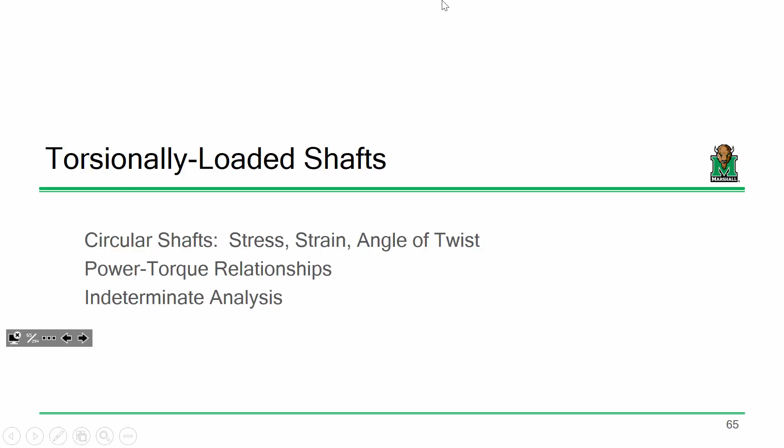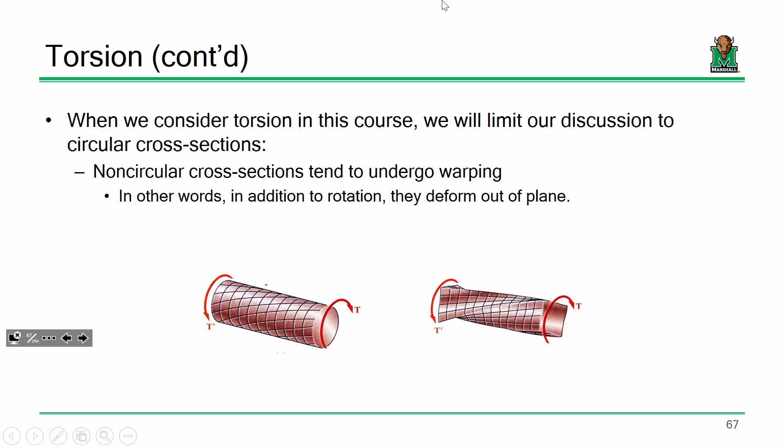Okay, so I'm not going to go through this derivation again, I promise I won't do that to you, but I do want to at least go through the broad strokes. So we're talking about torsion now. The idea is you're taking a segment and you're twisting it. We talked about the idea that we're only going to reserve our discussion for circular members: shafts, pipes, things like that. Nothing square, nothing triangular. If I give you a torsion problem and it's non-circular, I made a mistake, okay?

Now, if you are interested in torsion of non-circular sections, take advanced stress analysis. As far as I know, I'm offering that next semester, so that'll be some good stuff. There's some fun stuff in that class. It's sort of mechanics of deformable bodies 2, if you will.

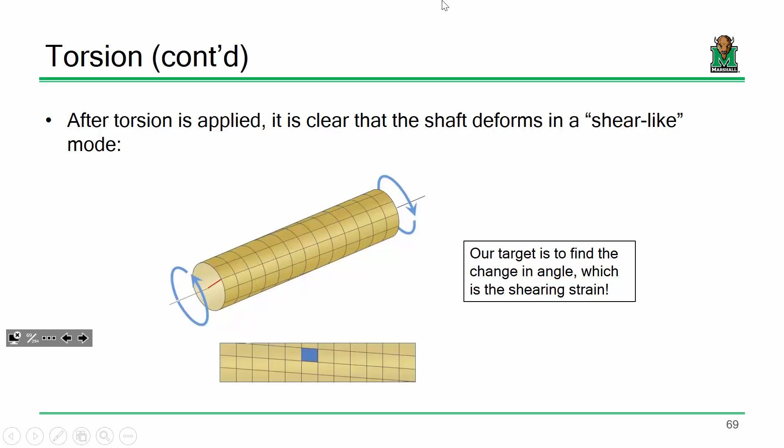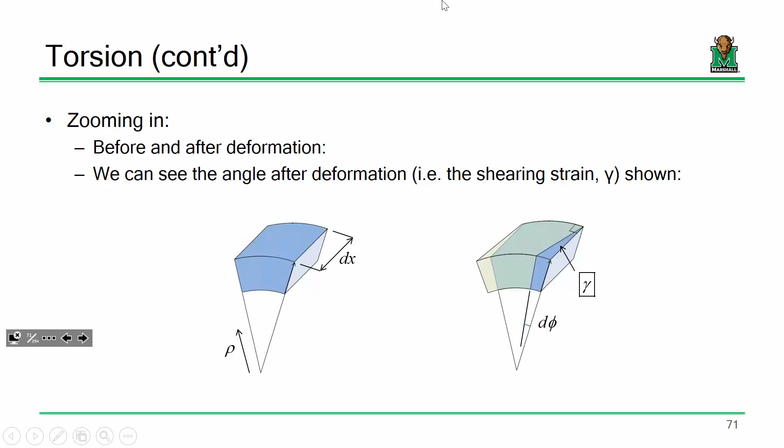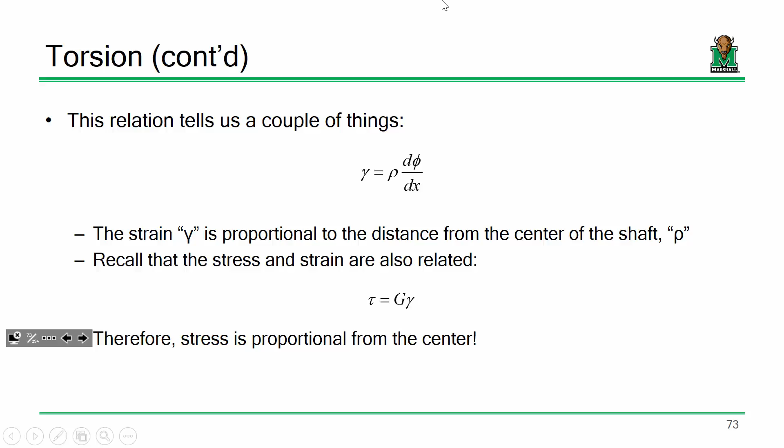Okay, so we went through our derivation, and I'm going to skim over this very quickly. But a few of the observations that we made were that the deformation and the strains were proportional to the distance from the center. In other words, if I take a circular shaft and I twist it, I don't get any stresses or strains at the dead center.

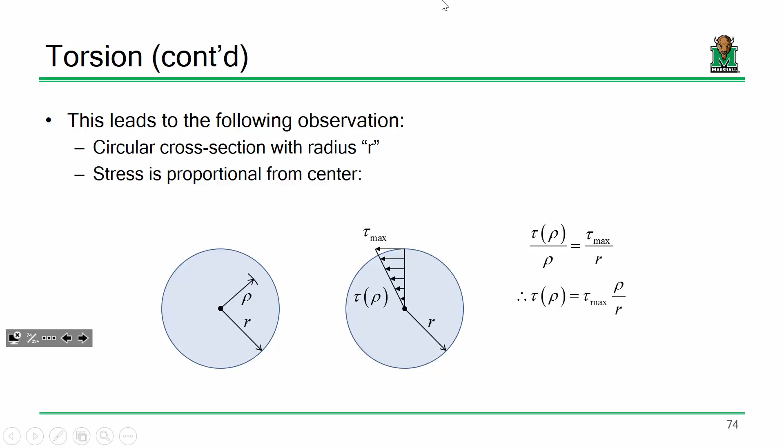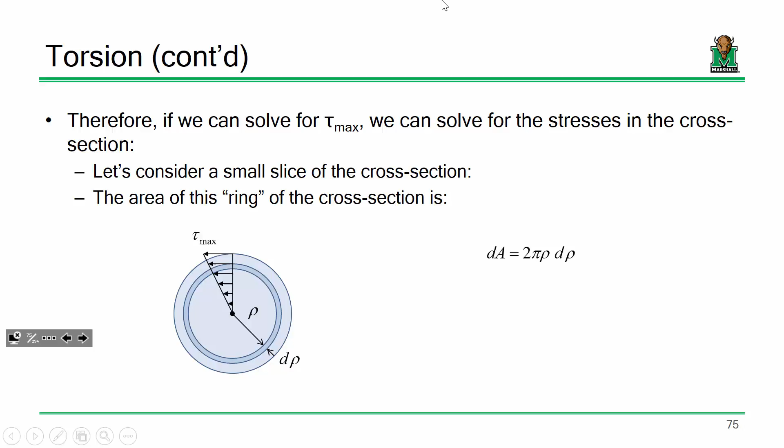But the farther I get away from the center, the more stresses and strains I develop, okay? So we have a shear stress profile that looks about like this: linear from the center, zero stress at the center, maximum stress at the edge. And then we use some integration concepts to integrate that stress, and ultimately that torque about that cross-section, to try and solve for that maximum stress.

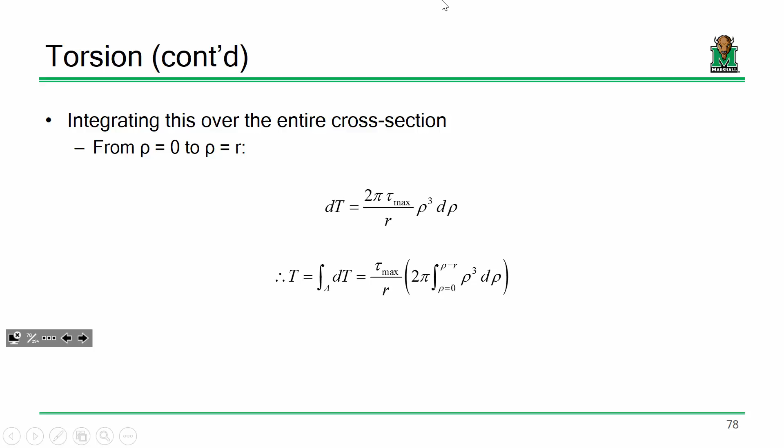And after you go through the calculus and plug and chug and do the grunt work, you find that you're isolating a very particular integral by itself. You're isolating this: 2 pi times the integral of rho cubed from 0 to r. That is a very particular important integral, and it is a particular what we call section property.

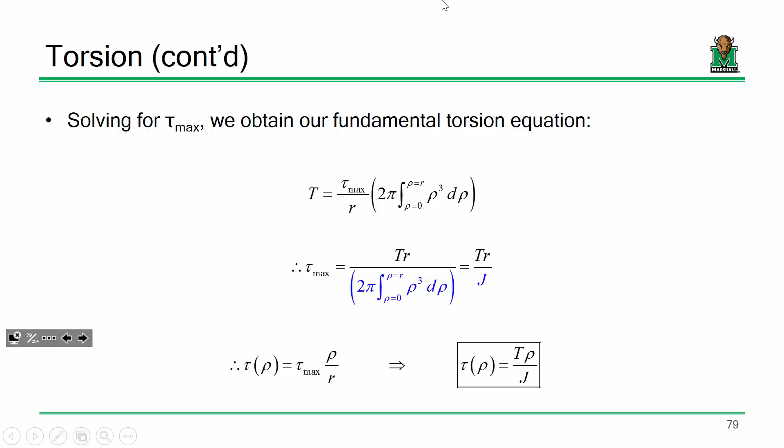So the idea is if I take a samurai sword or lightsaber, if you're a sci-fi fan, and I cut through that circular shaft, I'm looking at a circle. There are certain properties of that circle that are important to us as engineers, things like the area, things like the center of gravity, and also things like J, things like this integral.

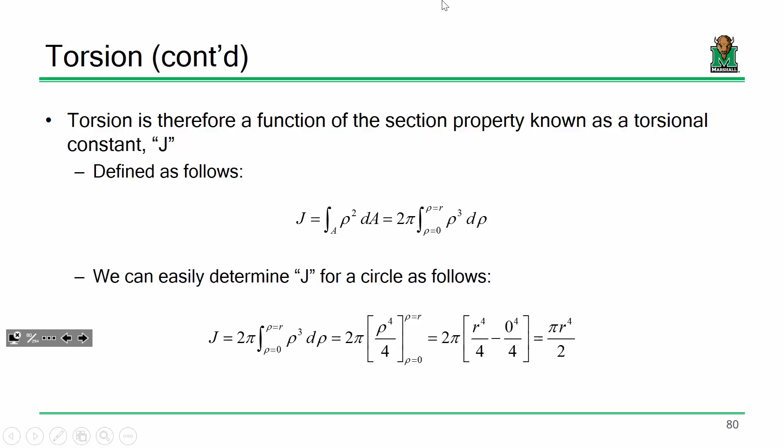J for a circle is essentially the same thing as the polar moment of inertia, which is why the book uses I sub P. I like to use J because it differentiates between pure torsion and that warping aspect that we mentioned later. Plus J's less letters than I sub P, so I tend to be lazy when I can be.

Okay, so the nice thing about it is they're very easy plug and chug expressions. So this is J for a solid shaft, and this is J for a pipe. Similar to how you compute area, if you've got a pipe, you take J for the large section minus J for the small section, and you get J of that ring, that pipe.

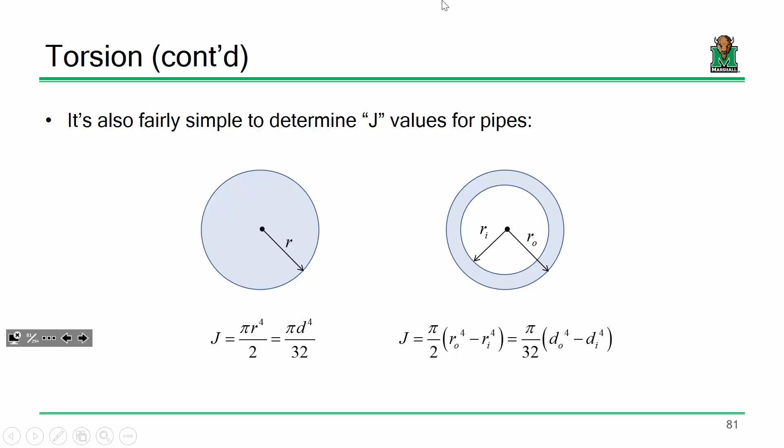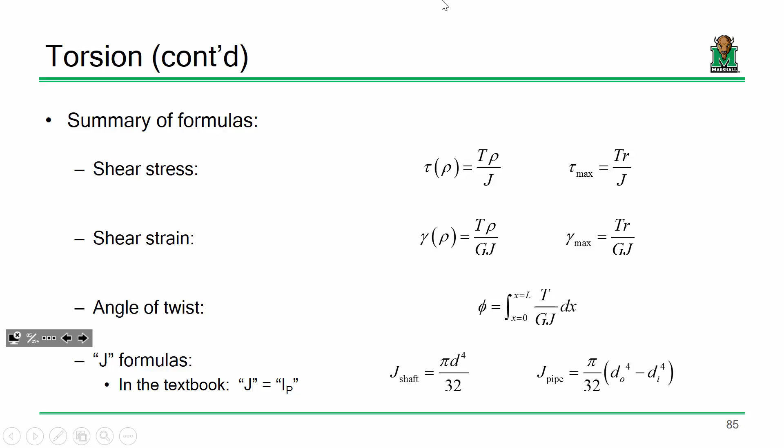Going through and doing some plug and chug, skipping over this quickly, we're able to obtain a summary of torsion formulas we'll use in our assessments. Shear stress is T rho over J, and the maximum stress is at the edge, TR over J. Shear strain is that divided by G, which is the shear modulus, just like E is the axial Young's modulus. We've got our angle of twist, J formulas for shafts and pipes, and if we've got a constant T and constant J, we can just plug and chug.

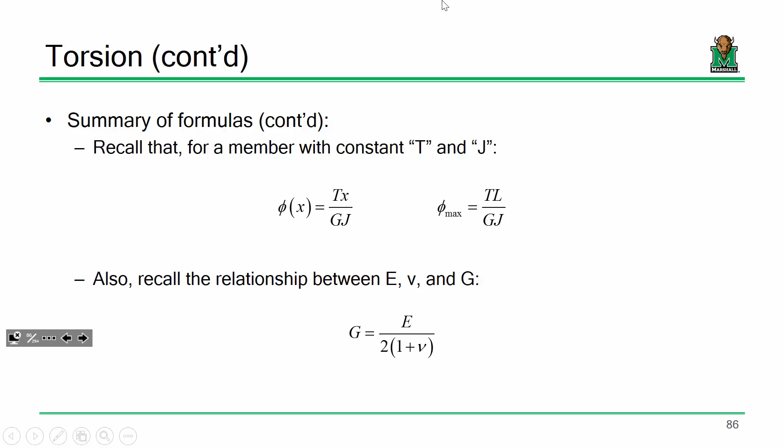Okay? Make sense? Last thing, remember your relationship between E, Poisson's ratio, and the shear modulus G.

And then we did this example, we did this one, and we hadn't quite gotten to this one. So did anybody have any questions about this example? If I remember correctly, we finished it just in the nick of time. So is everybody good on this?

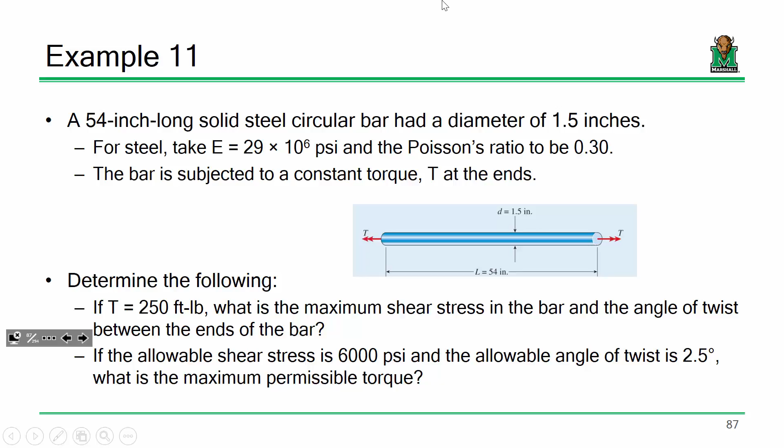Okay, so I got another one for you, somewhat similar. Let me move some of this stuff out of here. All right, give me a moment, let me get this organized so I'm not creating a complete mess. You'll notice some of this stuff probably has a little bit more of a mechanical flavor than civil flavor, but that's just the nature of the beast when it comes to torsion.

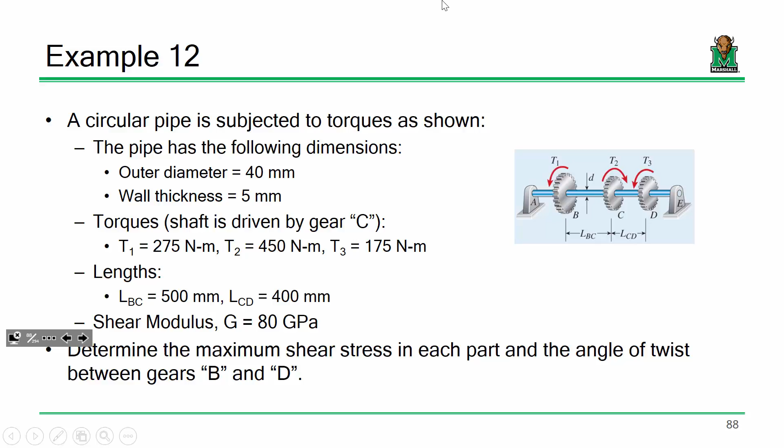All right, so let's see if we can start listing some properties and being clear on some of this. Let me get some of this out of the way. I keep moving stuff around, but it'll be all right.

So the first thing I want to do is look at some given parameters, and the first thing I want to look at is that pipe. Let me go back to this. Wait, wrong one, let me go back to this. Okay, so let's read what it says: I have an outer diameter of 40 millimeters, and I have a wall thickness of 5 millimeters.

Now maybe what I ought to do right off the bat is choose something: I'm going to choose that my forces are ultimately going to be in kilonewtons, and my lengths are going to be in millimeters, just so we can be clear. I'm usually a U.S. units guy, so it helps me out - a lot of the stuff we've done in U.S. units, we've reserved ourselves mostly to kips and inches. I just wanted to set that right off the bat.

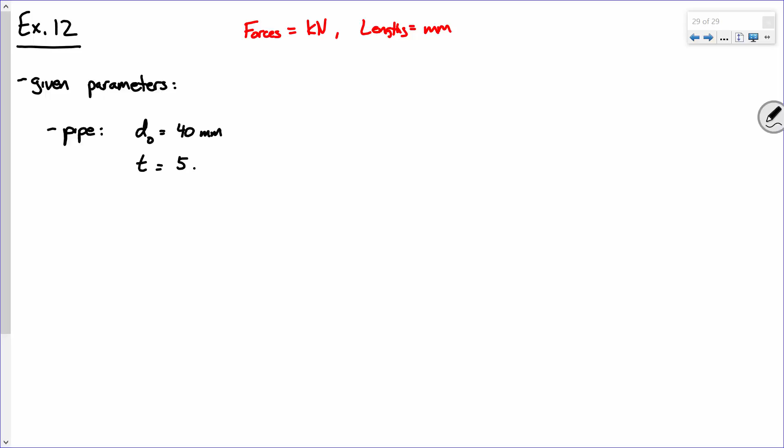Now for this pipe, we know the outer diameter is 40 millimeters, and the wall thickness is 5 millimeters. So help me out, what's the inner diameter? It's 30. Now if that's unclear, let's take a look at this - so here's the pipe.

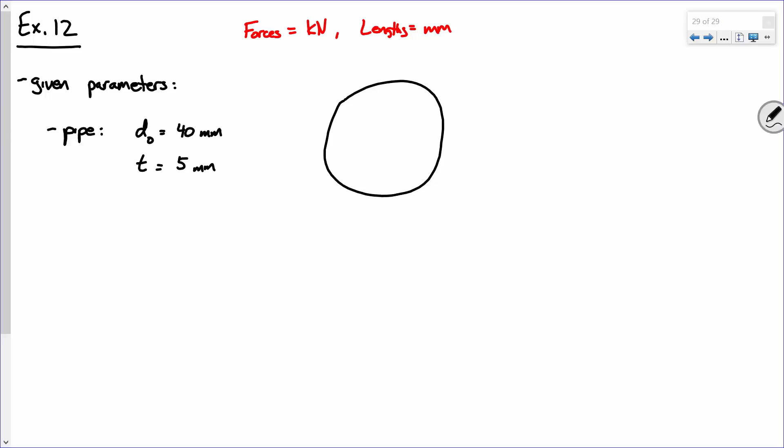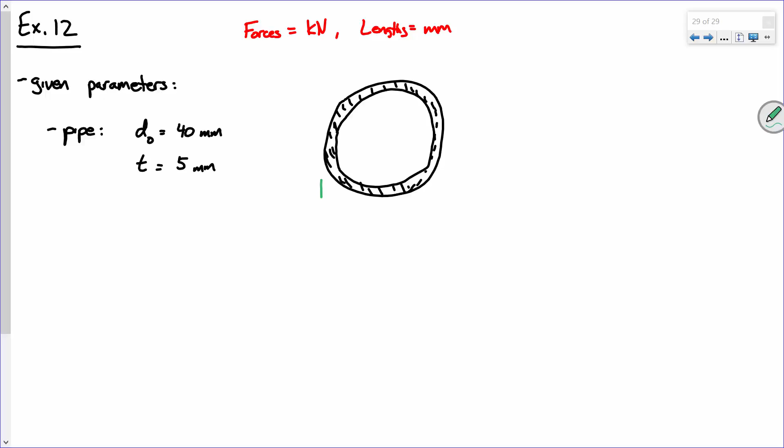Okay, I'll shade that in a little bit. So there's the pipe - those are the best circles you're going to get me to draw. This outer dimension we see right here, this is 40 millimeters, right?

Now this wall thickness right here is 5. So how do I get from here to here? Well, I take 40, and I've got to subtract one on the right and one on the left - I got to take 2 wall thicknesses off. So that means this is 30 millimeters. So DI is DO minus 2T, which is 30 millimeters. Make sense? Not too bad, right?

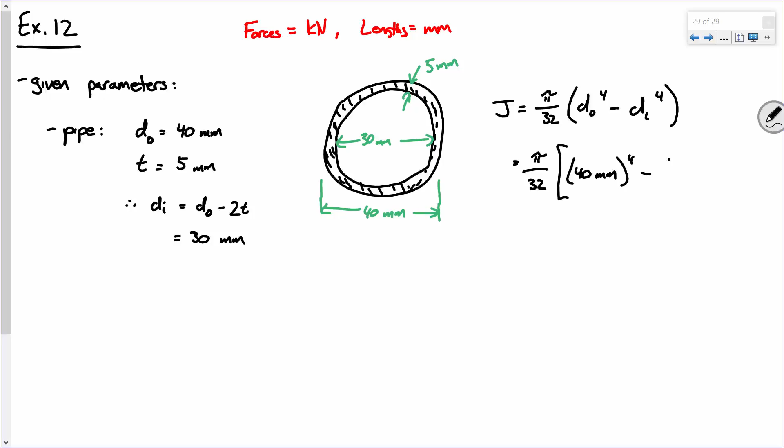All right, if I'm given that, I can go ahead and compute J. Now J, for a pipe, is pi over 32 times d naught to the 4th minus di to the 4th. Make sense? So that is pi over 32, 40 millimeters to the 4th minus 30 millimeters to the 4th. And so what do we get right here?

There we go. All right, so 171,805, point 8 or so, millimeters to the 4th. All right, so far so good.

Now I wanted right off the bat to put these units down because I wanted to show you something you might not remember. So I want to look at G. Our given parameter, we know G is - was it 80 gigapascals? Well, the nice thing about the units is that if I take a kilonewton and divide it by a millimeter squared, I get a gigapascal.

So I don't need to convert anything at all, okay? See, a newton per meter squared is a pascal. Well, if I'm multiplying by 1,000 and then dividing by 0.001 squared, go through and do all the math, that turns into that giga prefix. All right, sound good? Everybody okay with that? Yep. You got 10 to the 9?

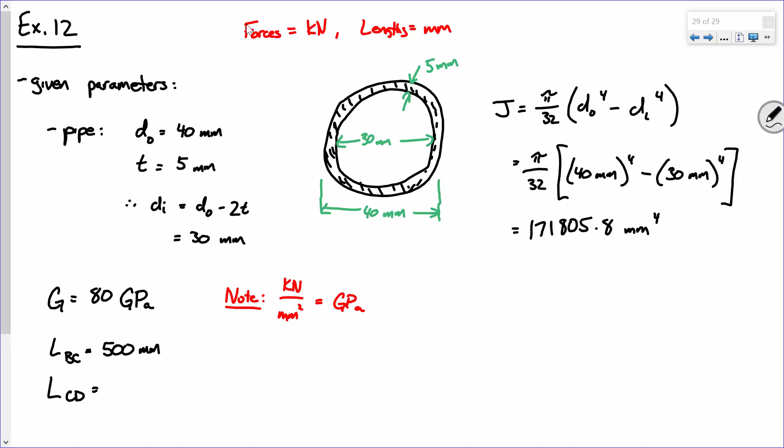All right, now let's also write these lengths. So the lengths, we've got length BC, which is what - was that 500 millimeters? And length CD, which is 400 millimeters. All right, so far so good?

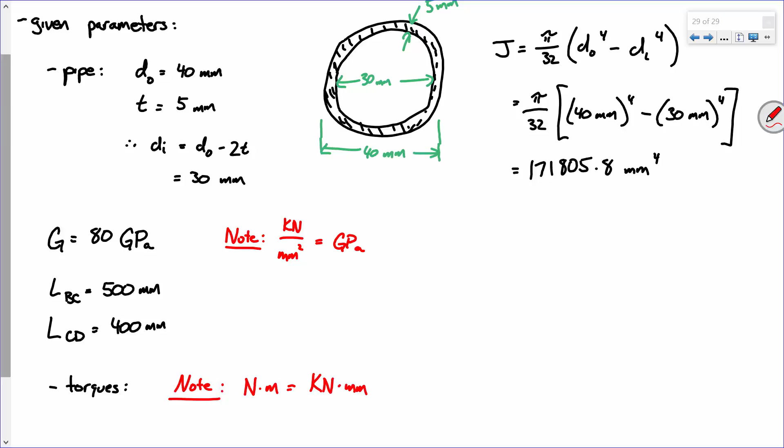Okay, now let's also look at these torques. There's also another nifty component about torques before we begin. Note, I propose to you that a Newton meter is the same thing as a kilonewton millimeter. It's the same thing. Now how am I getting that? Well, that K, when you see K, basically you're just multiplying by 1,000.

So if I multiply by 1,000, or 10 to the 3rd, and then multiply by that M, which is basically dividing by 1,000 - what's 10 to the 3rd times 10 to the minus 3rd? Just cancels out, it's just 1. So a Newton meter and a kilonewton millimeter are the same thing.

Yes sir? Well the gigapascals, how did you get 10 to the 9? Okay, because what I'm doing is this - watch this. So I've got 10 to the third times newtons, and I've got 10 to the minus third times meters, squared. So that's going to be 10 to the third newtons over 10 to the minus 6 meters squared. So 10 to the ninth Newton per meter squared. Because when you divide, remember you subtract the exponents, so it's 3 minus negative 6, or 3 plus 6. That's 9. That's a good question.

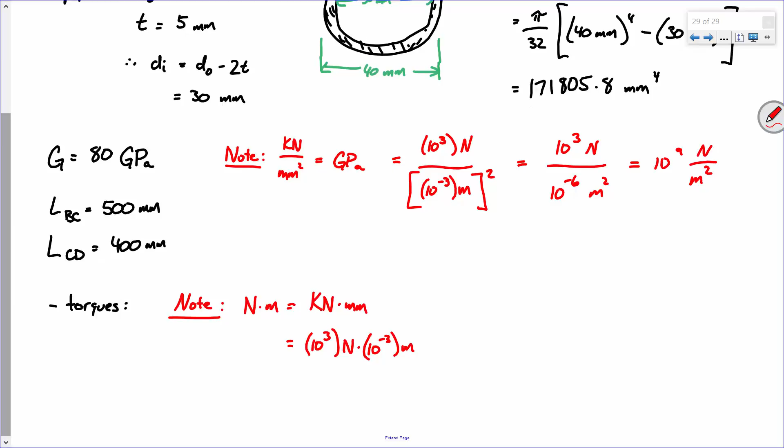All right, everybody good? All right, so far so good? All right, I'm going to run out of room here, so I'm going to go ahead and go on to the next panel. Everybody good?

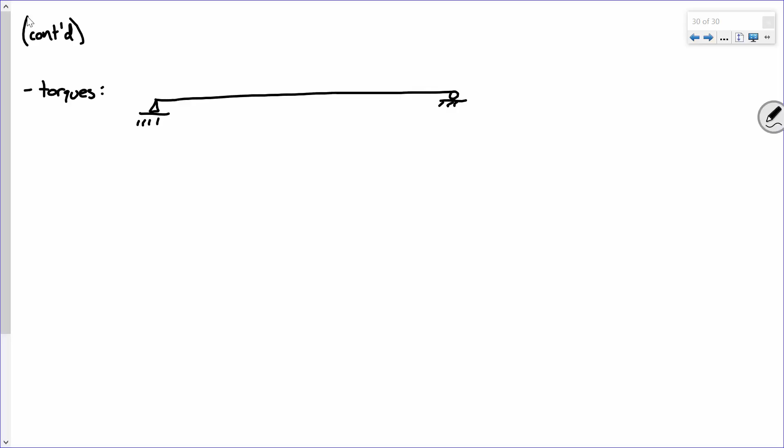All right, okay, so let's look at these torques. Now what I'm doing is I want to determine the torque inside each component of this bar. So what's the bar look like? It's kind of like this, kind of like that. So let's call this A, B, C, D, E, okay? And let me give me a moment, let me go ahead and pull the image up.

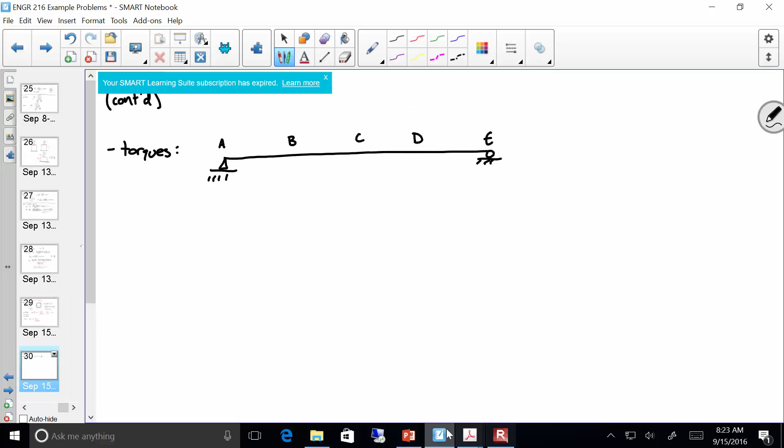Oh wow, that is much larger than I thought it would be. Okay, so using our right-hand rule, remember that right-hand rule?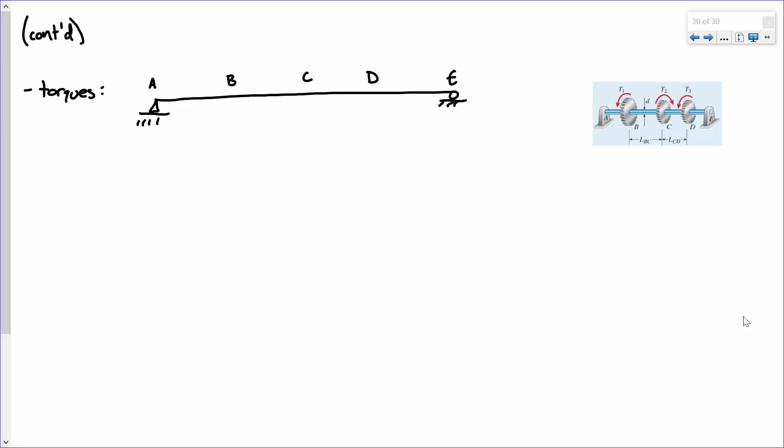Okay, so torque 1 is sort of going like this, right? T1, so it's sort of like, right here, and it's going like that, along the shaft, right? Make sense? And so this is T1, and what's the magnitude? What's that, like 275 kilonewton millimeters, right? Because that's what's going on there.

Now T2 is going in the opposite direction, like that. So that's T2, and that's 450. Oh, getting ahead of myself. And then this one's going like that. So T3 is, was it, oh no, it's 175, right?

Okay, does everybody see how I'm doing that? I just want to make sure you all are understanding the sign convention. So far, so good?

Now let's just be clear on our goal here so that we understand why I drew all of that. Let's look at, for instance, segment BC. We know the length of that segment, we know the G for that segment, and we know the J for that segment. And same thing with CD, we know how long it is, we know the G, and we know the J. What we don't know are the torques, okay?

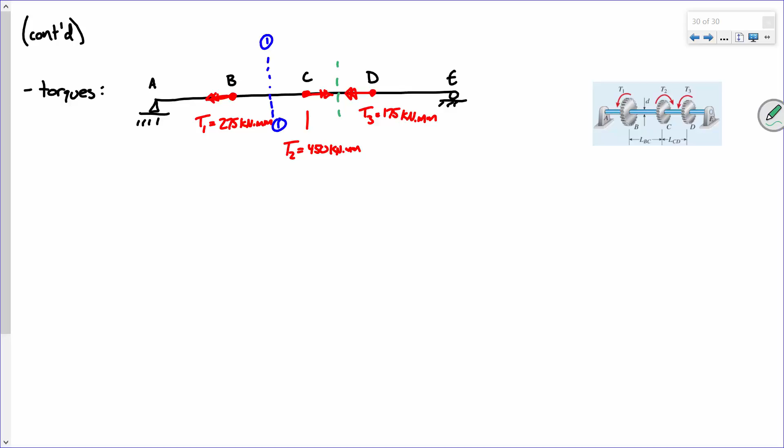Section 2. Yes? T1, if you go like, use the right-hand rule, is it pointing to the right? Follow it like this. Oh, I did that backwards, didn't I? So, oh, they're all backwards. Whoops. It's me going like this, back and forward. So they're all backwards, actually. Whoops.

All right, down to 4 mistakes, I think, right? So that one's, yeah, that one's going like this. This one, yep, going like that. And this one's going like this. Make sense? So far, so good? All right.

So let's look at this first section. All right, so I've got T1 is 275 kilonewton millimeters, and here's where I cut the section. Now that torque is acting like this, right? So far, so good?

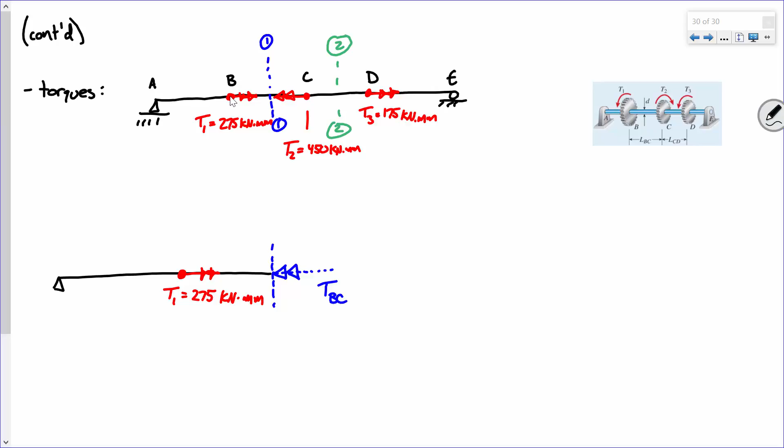Yep, so what that means is that inside this segment, I got to have a torque acting in the opposite direction, right? Make sense? So I'm going to call this torque BC. Make sense? And if I just think about it like it's sum of forces, if I sum torques and say the sum of torques has to equal 0, I get that TBC is 275 kilonewton millimeters acting like that.

Make sense? So far, so good? In other words, the torque, the shaft, or no, in this case the pipe, because it's a pipe, it responds by developing a torque in the opposite direction. Make sense? Not too bad, right? Okay.

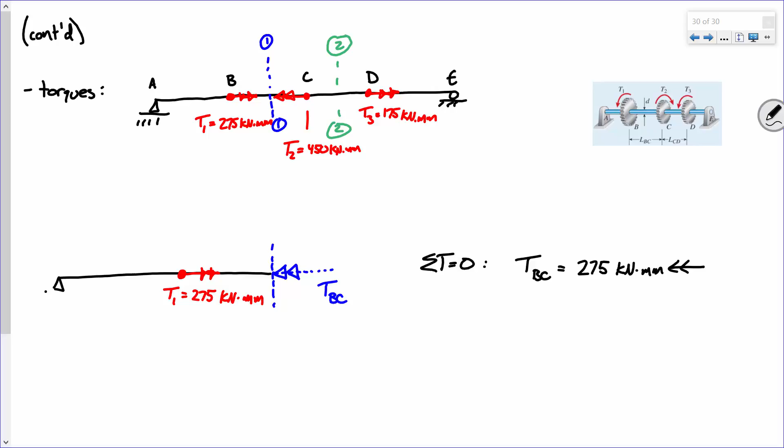Now, oh goodness, this thing's getting tangled. Now for the next one, I'm cutting this section like so, and I've got, what do I have? I've got T1 is 275 kilonewton millimeters acting like that, right? Make sense?

But I've also got, at point C, a torque going like this. Right? So think about it like this. If I've got 450 kilonewton millimeters going this way, and I've only got 275 going this way, I need a torque acting in the opposite direction.

What's that? No, well, think about it like this. Imagine if they were forces and not torques. Imagine if I had 450 pounds pulling to the left, and I only had 275 pulling to the right. I need an extra how much going to the right? 175, see what I mean? So the torque's going, think about it like it's forces, because it's basically the same thing. If I've got 450 going to the left, I've got to have 450 going to the right. In this case, we're not dealing with forces, we're dealing with twisting it, but basically we're saying the amount twisting it this way has to equal the same amount twisting it that way. Same concept, make sense?

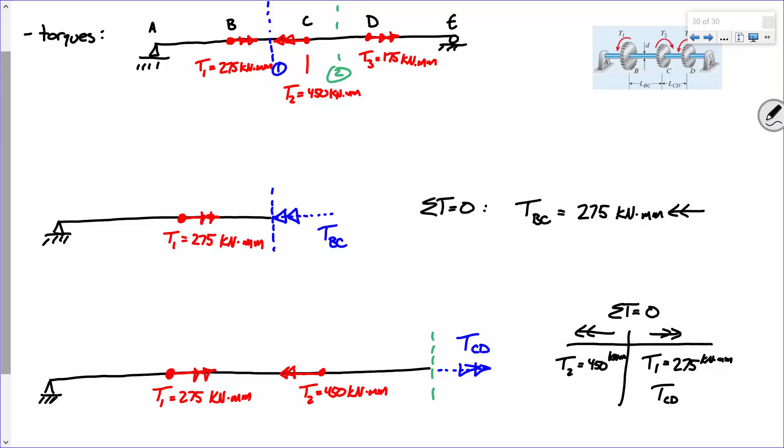And then TCD, I'm going to have 450 equals TCD plus 275. So therefore, TCD is 175, and it's acting like that. Make sense? So my point is that within segment BC, I'm going to get some rotation, and within segment CD, I'm going to get some rotation. The point is that BC is going to rotate one way, CD is going to rotate the other way. So I'm going to take those rotations, I'm not going to add them up, I'm going to subtract them. Does that make sense? Okay.

So is that like an internal bending moment? Yeah, but it's bending along the axis. It's a moment, but it's along the axis. It's axial. Not like this, like that. But yeah, it is a moment. Make sense? Okay, all right. Everybody good?

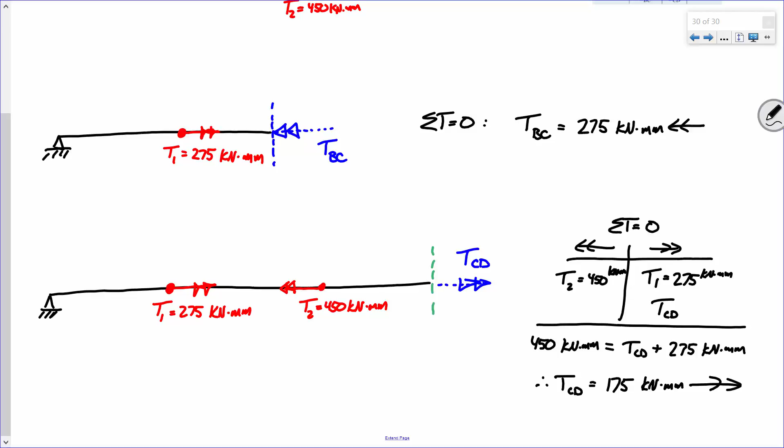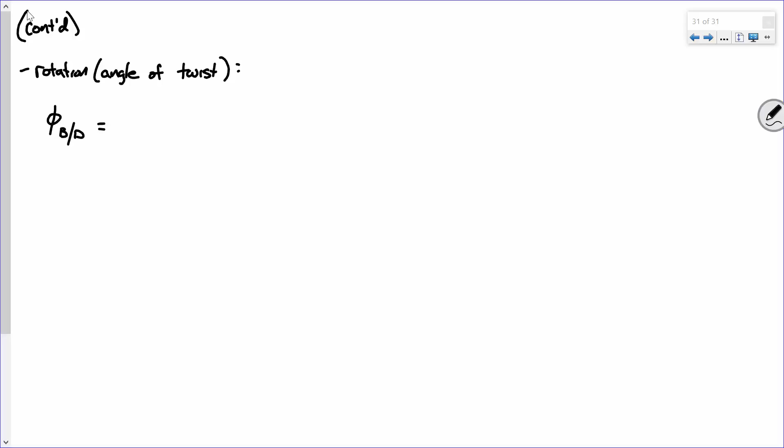Okay, so now what we're going to do is we're just going to take care of this directly. Let me start off with the rotation first, because I think that this is going to be the most straightforward. Let's start off with the rotation, or the angle of twist. Here's this. Okay. Now, ultimately, what we're trying to find is the angle of twist between point B and point D. Okay? I propose to you that to get the angle of twist between those 2 points, all we have to do is just sum up along the length. In other words, I propose that we take the angle of twist between B and C, and then add to that the angle of twist between C and D. Does that make sense? That if I get the angle of twist from here to here, and then the angle of twist from here to here, I get the angle of twist between the whole thing. Make sense? Okay. All right.

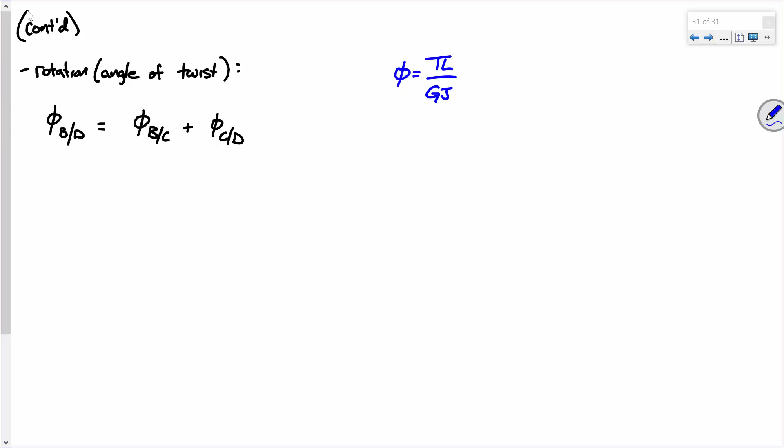So how do I get the angle of twist? Well, I mean, how do I get it in general? I have constant torques within each of those segments, and I have constant J for each of those segments, right? So if I got that, it's TL over GJ, right? No integration. So let's take each of these one at a time.

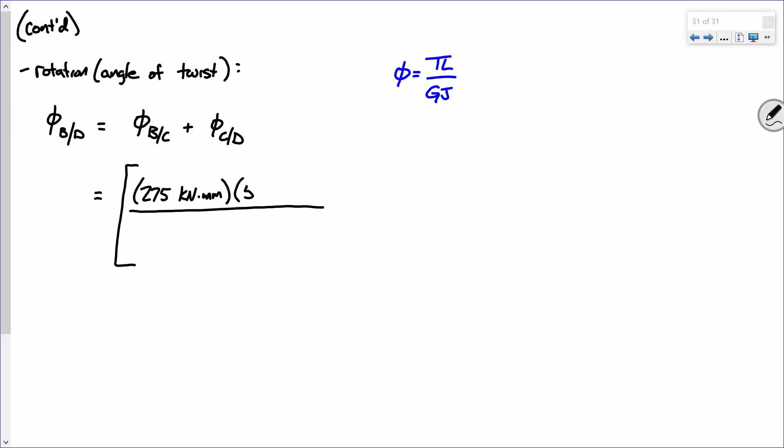All right? Let's take BC. What is the torque inside BC? There we go, 275 kilonewton millimeters, right? What is the length of segment BC? There you go, 500, or LBC, which was 500 millimeters. So if you want, I can say, all right, this is TBC, this is LBC, right? Okay, what's G? And then what's J? Well, that's the one we computed. That was like the 171,805.8 millimeters to the fourth.

Now, what I'm going to go ahead and do is this. Now, which way was that torque acting? It was acting like that, right? So I propose that that angle needs to be expressed, I'm going to include that sign in that fashion, just so I'm not confused about the sign convention. Make sense? Okay. So that's that angle of rotation.

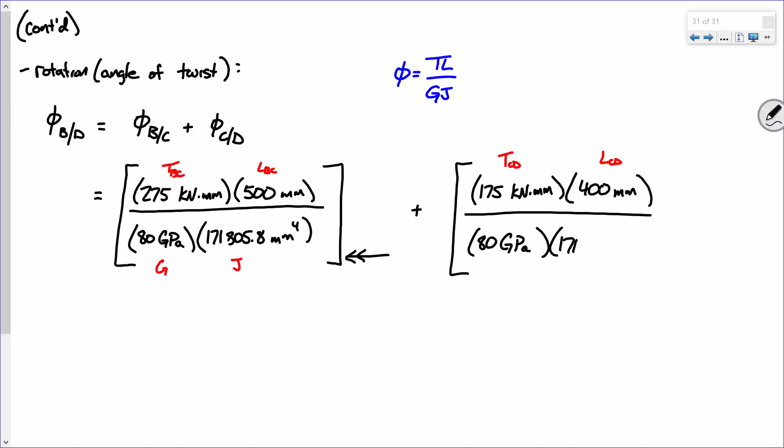Now let's do this. All right? So maybe I'll do G, J. Okay. So what do we got? Okay, so we need TCD, which is what? 175? LCD, that's TCD. Then we need LCD. And what is LCD? And then it's the same GJ, right? So 80 gigapascals, and then millimeters to the fourth. So G, J. Now, just so I'm clear on signs, this one was acting that way, right? Make sense?

All right, so let's take each bracket one at a time. And let's do it to 4 decimal places. Now keep in mind, these are rotations, so they will come out small. What will the units be if I plug and chug these numbers into the calculator? It's a rotation. Okay, all right. If the unit, all right, keep in mind, everything's kilonewtons and everything, it's unitless, right? And when you express an angle without units, what are you expressing it in?

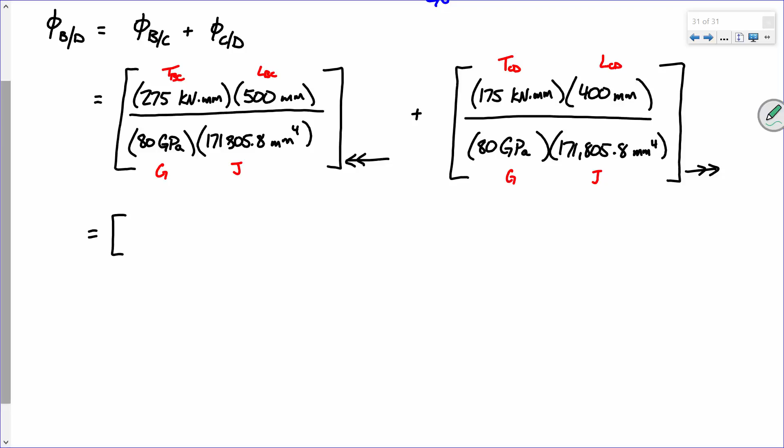Radians, okay? So this is, whatever we get is going to come out in radians. Now, if it's still a little iffy, you can go through and do a unit analysis here on the bottom and say, all right, on the top, I've got kilonewtons times millimeters over gigapascals, which is kilonewtons per millimeter squared, times millimeters to the 4th. So on the top, I've got kilonewtons times millimeters squared, and on the bottom, I've got kilonewtons times millimeters to the 4th over millimeters squared, it's millimeters squared. So there are no units, okay? But when you express an angle without units, you're expressing it in radians, okay? So do that math and tell me what you get. Give it to me in 4 decimal places, let's say, just so we're clear. No, don't do that just yet. Just each fraction.

For the first one? Now this is a decimal on the 0.8. That might have changed things. There's a decimal right here. Because yeah, I got 0.0100 radians.

Maybe it was that decimal right here. Yeah. And that's going in this direction, right? Plus this. Now what do we got over here?

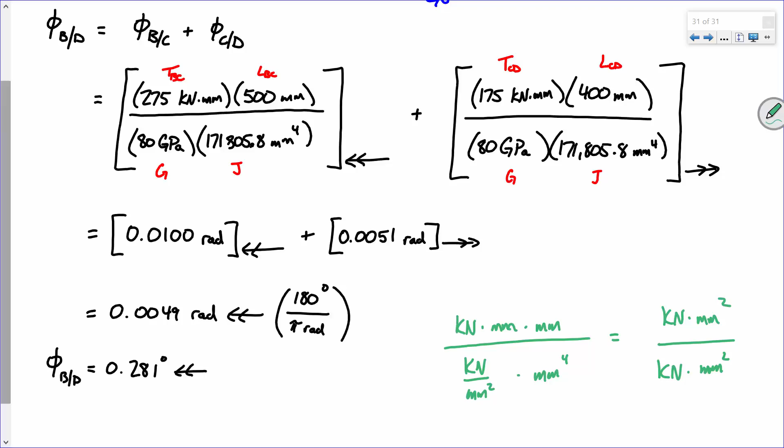All right. And I want you to behaviorally think about this a little bit. The rotation in segment 1 or segment BC was larger. And that kind of makes sense if you think about it. Remember, BC had more torque, right? BC had 275, CD only had

175. That's number 1. Number 2, segment BC was longer, right? It was a longer segment. So because it's a longer segment and it has more torque, it's going to rotate more, okay? Because again, the angle of twist is a function of its length. The longer it is, the more it's going to rotate, okay? All right, that makes sense?

Okay. Now, one of the other things that this problem asked was for the maximum shear stress, okay? Now, when it comes to maximum shear stress, the pipe is the same size on BC and CD. So let's go back to this. How do we calculate maximum shear stress? What's the formula for maximum shear stress?

T R over J, right? So the J is the same on both shafts, and the R is the same on both. And I keep saying shafts. This one's a pipe. It's a pipe segment. So really, to get the maximum shear stress, all we need is the pipe with the maximum torque.

And which is that, BC or CD? Which one has more torque inside it? BC, right? Because look right here. All right, BC has a torque of 275. CD has a torque of 175. So the maximum shear stress is going to occur inside segment BC.

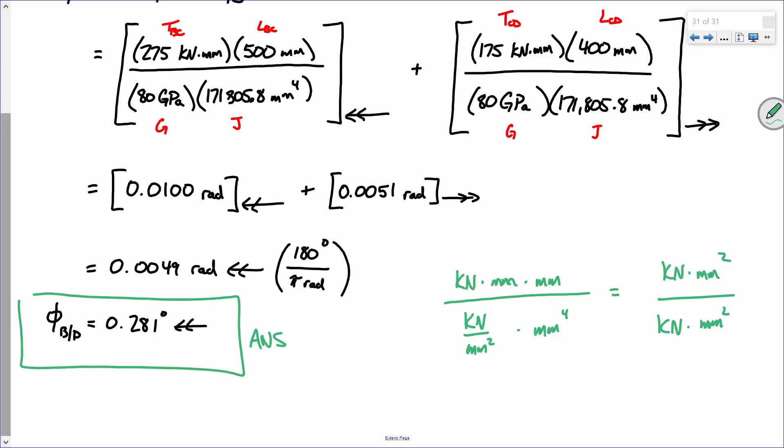And that's all there is to it. So I'm going to go ahead and go on to the next panel. Everybody got this? All right. So, max shear stress. All right, so how do we get that?

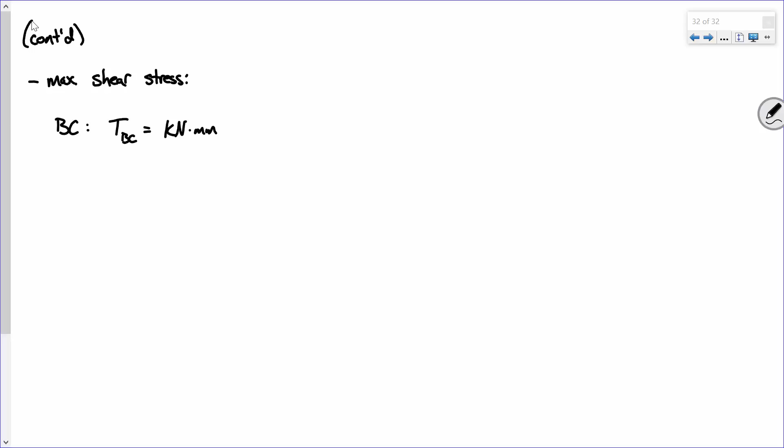Well, we recognize that that's going to be in segment BC just because segment BC has the larger torque. All right, excuse me, sorry. Now we know that the outer diameter is 40 millimeters, so the radius is 20 millimeters. And J is that 171,805.8 millimeters to the fourth.

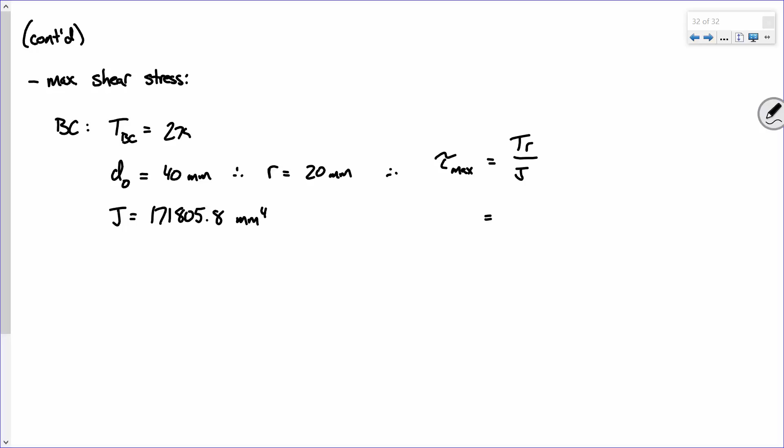So tau max is TR over J, which is, oh, I didn't put the number, 275. I just wrote the units. All right, so 275 kilonewton millimeters times 20 millimeters over 171,805.8 millimeters to the fourth. And we get a tau max of what?

It might seem like a small number, and that's okay. 0.032. Now, let's see, what are the units for that? Kilonewton per millimeter squared. And what is a kilonewton per millimeter squared? Gigapascal, okay? So if I want, I could say this is 0.032 gigapascals, or if I want a more usable unit, I might say 32 megapascals.

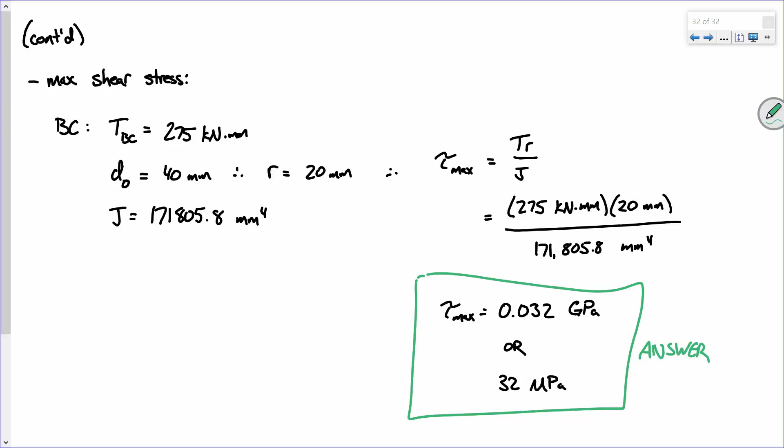Not too bad, right? It's not too bad, right?

Keep in mind the big picture, the point. What you would then probably do is say, let's say this shaft or pipe is made out of titanium, aluminum, whatever. Let's say it's made out of aluminum. For aluminum, what is the maximum allowable shear stress, and see whether or not this is an acceptable design. If not, either change your material, change your wall thickness, whatever you need to do to improve its behavior. Make sense? Any questions?

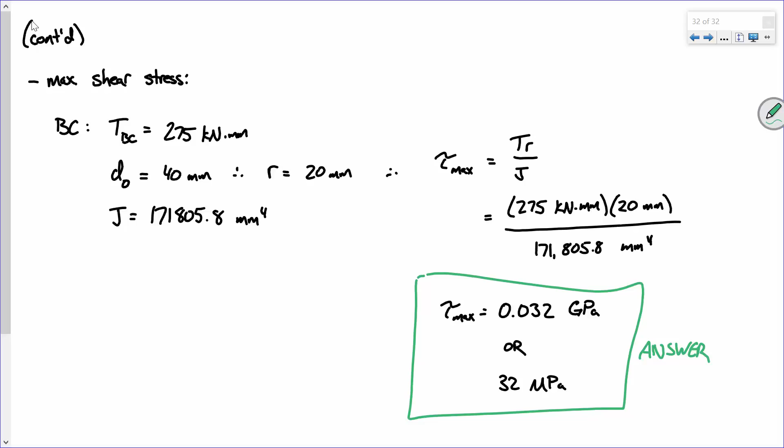Let's see where we're at. Oh, we're doing good. Okay. Any questions?

Now, this is about as mechanical engineering a topic as I can cover, so let's talk a little bit about power-torque relationships. What we're going to do is look at the relationship between supplied torque in a torsionally loaded shaft or pipe and resulting power. I'm going to break it back to physics, to something I think you've seen before.

Let's go back to try and define what power is. I think the easiest place to start is with work, one of the fundamental concepts you learn in physics. What is work? It is a force acting over a given distance. So you define work as force times distance. Now that's linear, taking a force and going through a distance. You can also define work as torque going through a given angle. So if you have force acting through a given distance, or torque acting through a given angle, that's work.

So that's work. Now what's power? Power is the rate at which work is done. Rate, that's rate of change, i.e. derivatives. So power is the rate at which work is done, the derivative of work with respect to time. Make sense?

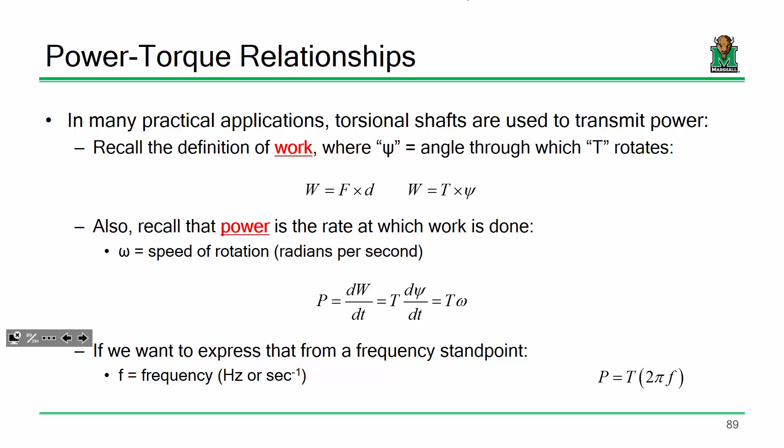So in other words, this is angular speed, torque times what we call omega. So if we want to express that from a frequency standpoint, cycles per second, we have to turn that angular speed into a cyclic speed, so we just convert that with 2 pi. The number of revolutions. So far, so good?

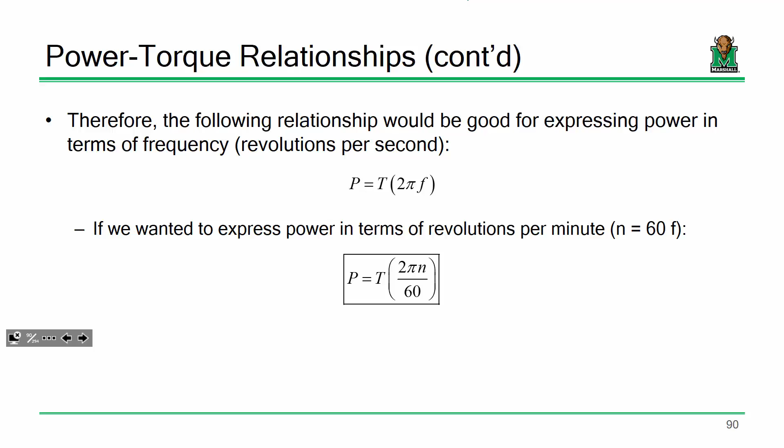So what I've got here is a relationship where I'm taking applied torque versus frequency, revolutions per second. This is sort of my power-torque relationship. Now if my base unit of time is in seconds and I want to convert this into revolutions per minute, I've got to include a 60 in there as well, since there's obviously 60 seconds in a minute. So this is a power-torque relationship that relates the number of revolutions per minute, N, and 60, so applied torque and resulting power in terms of revolutions per minute. So far, so good? Pretty straightforward.

What gets funky are some of your unit conversions in regards to power. Let's look at some of the units in US units and SI units. If I'm looking in US units, a very common expression for torque is foot-pounds. So you'd think the resulting power would be foot-pounds per second. In US units, you don't really hear much about power in foot-pounds per second, but a very common expression for power is horsepower, right? Everybody's heard the term horsepower. Well, 1 horsepower is 550 foot-pounds per second.

So go through and do the unit conversion, and what I tried to do was come up with a nice, pretty plug-and-chug expression for you. In this box, what you would do is take a torque in foot-pounds and multiply it by the following expression where N is your RPMs, revolutions per minute, and that will generate a power in horsepower. How do I get that? I take my original expression and recognize that 1 horsepower is 550 foot-pounds, and then on the bottom, what's 60 times 550? There you go. So that's just a nice, pretty plug-and-chug expression for US units.

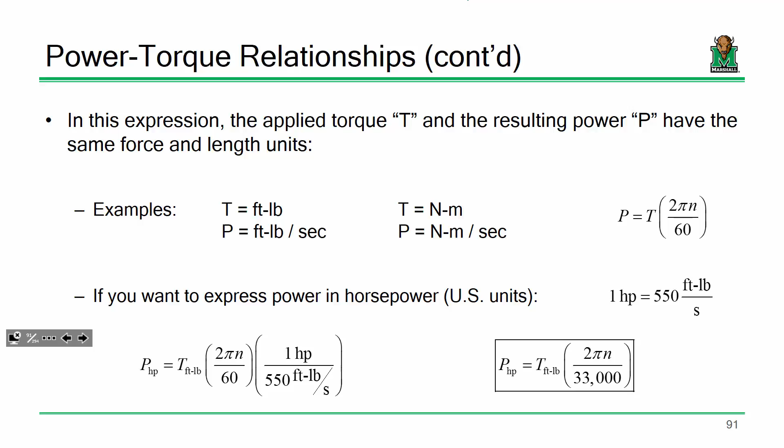I think you'll see here in a second how this really isn't too bad, but this has some very significant practical applications. So let's look at this example.

So we've got a motor driving a solid circular steel shaft that's transmitting 30 horsepower to a gear. Because it's steel, I went ahead and provided the G value, the shear modulus for steel. So we've got this motor transmitting this power. The allowable shear stress in the steel is 6,000 psi.

So this is a little bit of a design question. I'm saying for steel, here's the maximum stress we're allowed to generate. Now the length of the shaft is 10 feet long, and now we're actually going to look at this from a design standpoint. I want to determine what's the required diameter of the shaft if it's going to be operated at 100 RPM, and what's the required diameter to limit its angle of twist.

Now I've picked this 5.73 degrees. That would come from either some fabrication specification or some code requirements for engines or what have you, just something like that. Or maybe just from the engineer who's saying, I'm limiting that angle of twist to that much, and you've got to design accordingly. All right, anybody have any questions?

Well, okay, so what that's indicating is that you're supplying torque. It is resisting torque in the opposite direction. That's what that's saying.

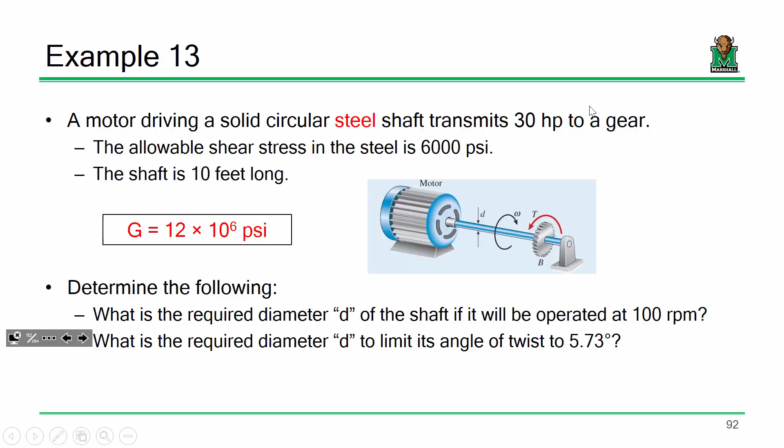All right, so far so good? Let's see, I think we can knock this one out. Okay, so now we're kind of in a design question, kind of. So what do we got? We've got given parameters.

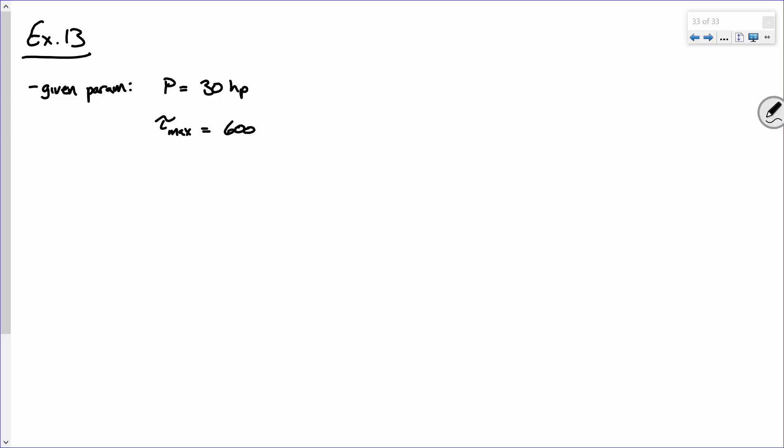So we got a power that was given as 30 horsepower. We've got a tau max of 6,000 psi. We've got a length that's 10 feet, and I'm going to go ahead and just say, 120 inches. I've got a G value that's 12 times 10 to the 6 psi.

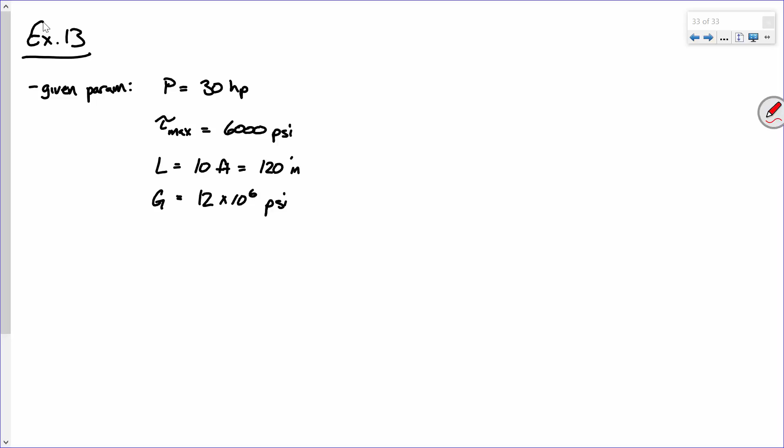Okay, so maybe if I wanted, I could do like I did on the last problem and say my forces are going to be in pounds and my lengths are going to be in inches, if you want to just do that right off the bat. That's not actually a bad way to go about some of these problems, just so you know when you input values into an expression that everything's consistent. Just sort of that mental reminder, okay, make sure I'm converting everything.

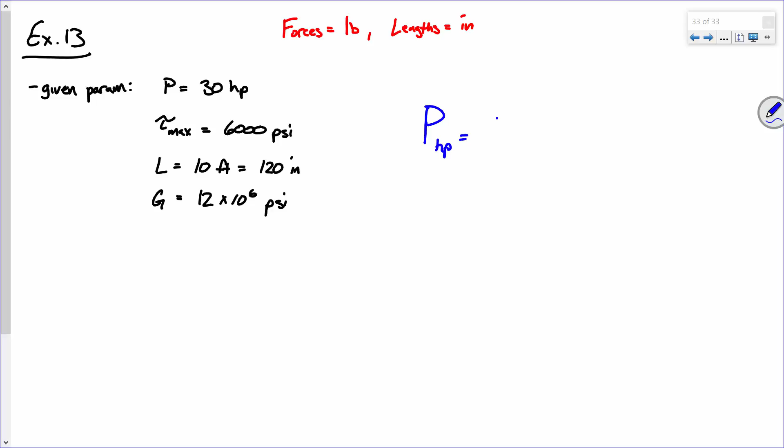Now, what I'm going to use is that relationship I derived a little bit ago that says my power in terms of horsepower is essentially my torque in terms of foot-pounds times the following conversion, 2 pi n divided by 33,000. Now, this n, I'll say for part A, we were given an angular speed of 100 RPM, 100 revolutions per minute. Make sense? All right, so what I'm going to do is this.

Foot-pounds, sorry, I left that off. So if I look at this expression and I say, all right, I've got a power in terms of horsepower, I know the angular speed. Since I'm in design phase, what I really need to know is the forces inside that shaft. If I know the forces, I can determine the required diameter. Now since we're dealing with torsion, it's not forces, it's torques. So if I've got this expression, I need to solve for the torque, right?

So I've got power, I've got the number of cycles. I propose that to calculate the torque in foot-pounds, it's going to be the power in horsepower times 33,000 divided by 2 pi n. Literally just flip and multiply.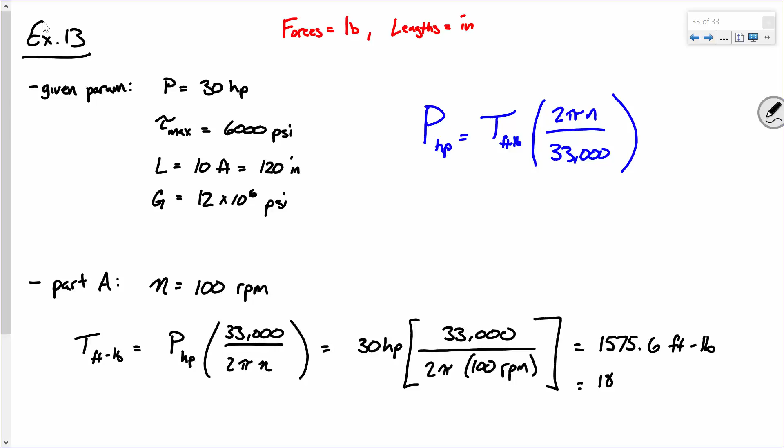Now this is in foot-pounds, so I'm going to go ahead and convert that to inch-pounds. So am I going to multiply or divide? Multiply. So that's 18,907.6 inch-pounds.

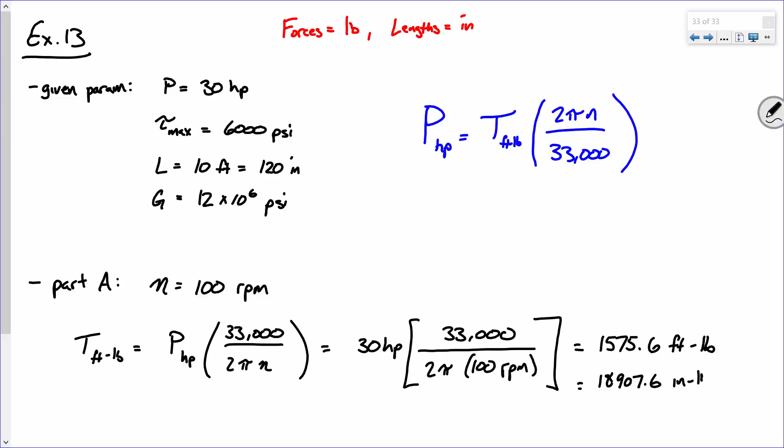.2? Okay, it's rounding, you know. It's not going to appreciably change anything.

Yes sir? You don't have to change RPMs to radians? Well, that's where the 2 pi comes from. So a couple things: radians per second is converted to revolutions per second through that 2 pi. Revolutions per second is converted into revolutions per minute through the use of that 60. That's a good question. The 60 is built into that 33,000 right here. That's where the 60, and then 60 times 550 comes from. No, that's fine, this is good stuff.

All right, so far so good? Is everybody else clear on that? Because I know we're kind of putting our blinders on a little bit with the units conversion, so that's fine. That's completely fair to ask. All right, so now we know the torque that has been supplied to this section. The torque that goes into this section is about 19,000 inch-pounds. Now, what do we know about this shaft? We know the torque going into it. We know the material it's made of.

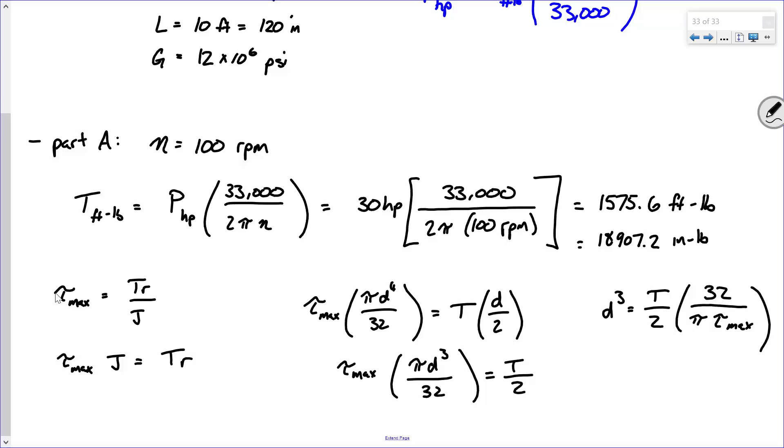I don't want to squunch this, so I'm probably going to go on to the next panel. Everybody got this? So before I do, what's going to happen to the 32 and 2? They're going to cancel out, right? Or cancel and become 16, right? All right, so continue.

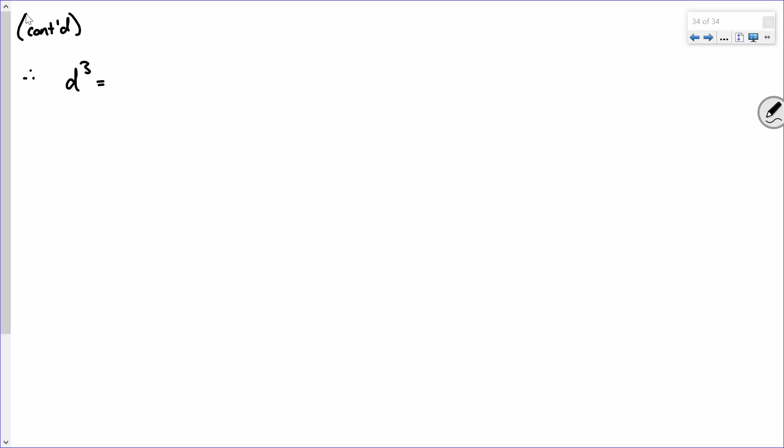So I propose that d cubed is what? What we got? 16T over pi tau max. Is that right? Did I forget anything? There we go.

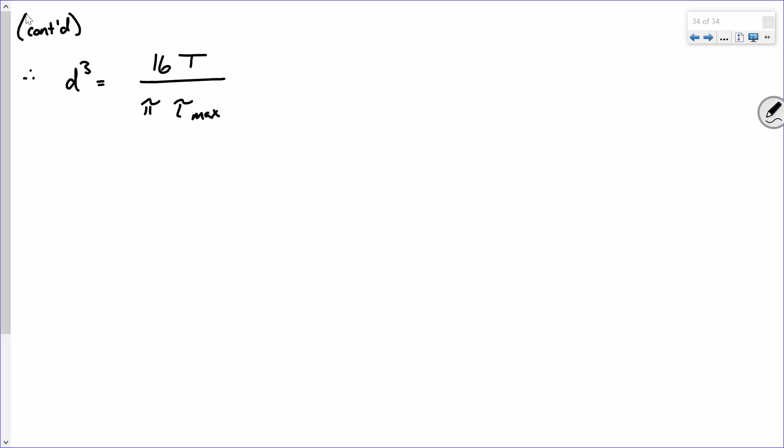So what is that? 16 times, what's the torque again? Was it 18,907.2? And then that's pi times 6,000 psi. What's that going to give us?

16.04. And what's our units going to be? Think about what we just solved for. What did we solve for? D cubed.

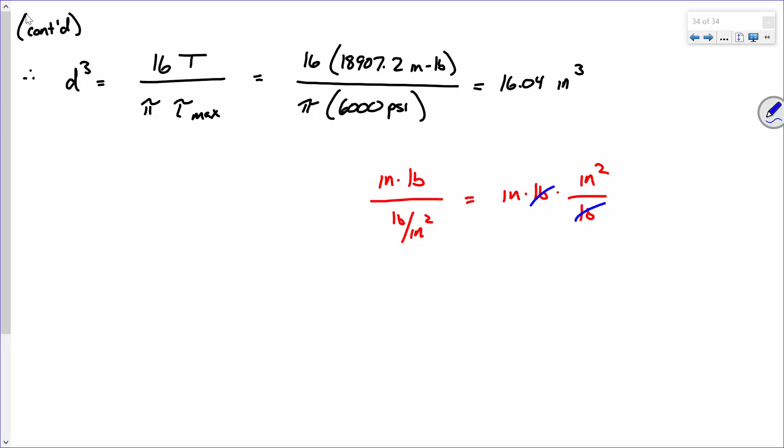Inches to the third. And if you need, look here on the bottom. I've got inch pounds divided by pounds per inches squared. So that's inch pounds times inches squared per pound, right? Flip and multiply. What happens? Pounds cancel, and I got inches to the third. Make sense? Again, be cognizant of that.

All right, here, I'll even move this over here. So if I got d cubed, how am I going to get d? Cube root of 16.04 inches to the third, and I get d is what? 2.52 inches. Whoop, I wrote it down right.

So there's your answer. In other words, if you're the engineer in charge of designing this shaft, you will specify that that shaft has to be at least 2.52 inches in diameter to safely resist that applied torque.

What's that? Well, I mean, maybe not necessarily. Depending on your factor of safety, you might go 2.75 or 2 5/8. You know, it depends. It also might depend on, was there a factor of safety built into that tau allowable? You know, maybe so.

You know, so just depends on what you're doing. And all, I mean, there's a little bit of what your specification dictates. I mean, I know in the world of structural engineering, a lot of our factors of safety are given to us. You know, you will use a resistance factor of 0.9. You use it. So it just depends on what you're doing. All right? Make sense?

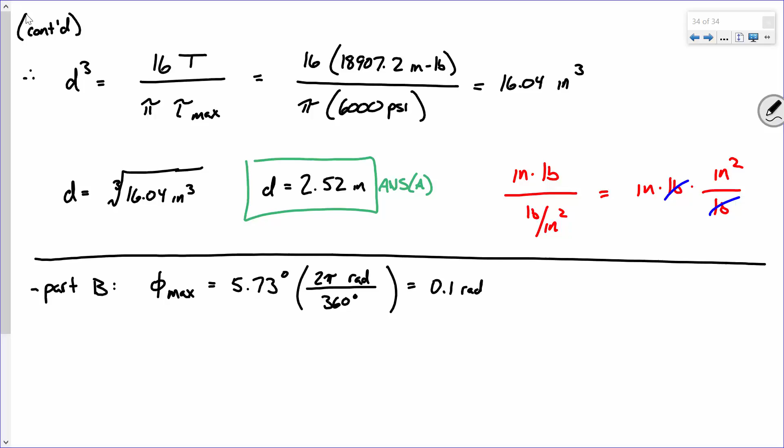Kind of funny how I suggested 5.73 degrees, right? Kind of funny how that works, isn't it? That wasn't intentional. No, all right.

Now, how do I calculate? Let's go back to our fundamental expression. If I've got an angle of rotation, how do I compute that for a shaft? With constant T and constant J. There we go, TL over GJ.

All right, now we're back in design phase. So what do we know? Well, we know G, right? We know L, we know how long the member is. We know the torque because we figured that out based on 100 revolutions per minute. We know that torque is, what was it, like 18,900 and whatever. So we know T, we know L, we know G. We're back in design phase, so what we don't know are the section properties.

We don't know J. J we don't know because we're trying to figure out what is our required J. What is the required section properties for this shaft to safely resist these loads? Now, last time we were looking at a maximum stress. Here we're looking at a maximum deformation. So really what we need to solve for is J. Now to solve for J in this expression, I just need to do a switcheroo, right? Just multiply the J, divide the phi.

What's that? Well, if I multiply this, I'm going to have J phi equals TL over G, and then just divide by phi on both sides. See what I mean? So TL over G phi. Make sense?

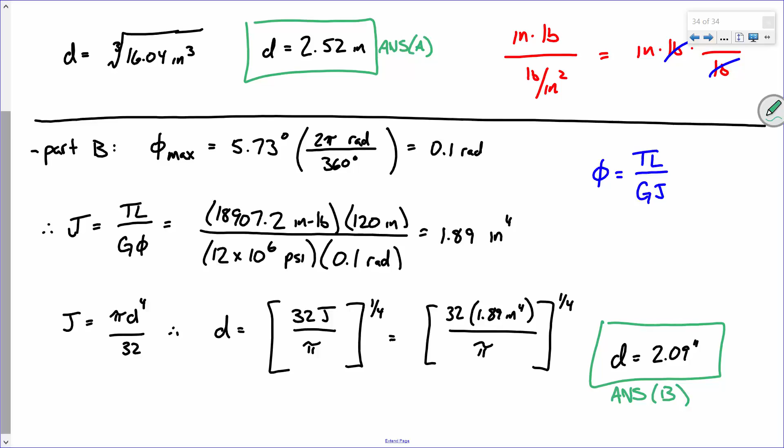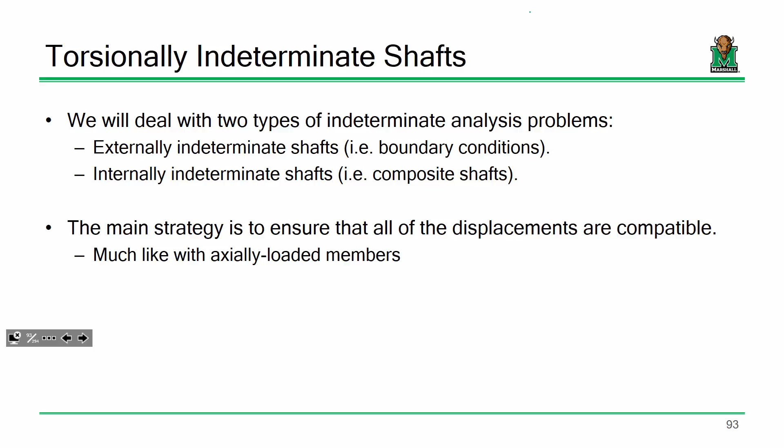All right, so real quick, a couple things. Next time in Engineering 216, what we're going to do next time is, like with axially loaded members, remember how we had internally and externally indeterminate bars or columns? Well, we're going to have indeterminate torsional shafts. So we'll have a problem like we did with columns, where remember we had that composite column, it was like a 2-inch diameter brass core and a 4-inch diameter aluminum sleeve around that. We're going to do something similar with the torsional shaft. It's going to be a 2-inch diameter solid aluminum shaft surrounded by steel.

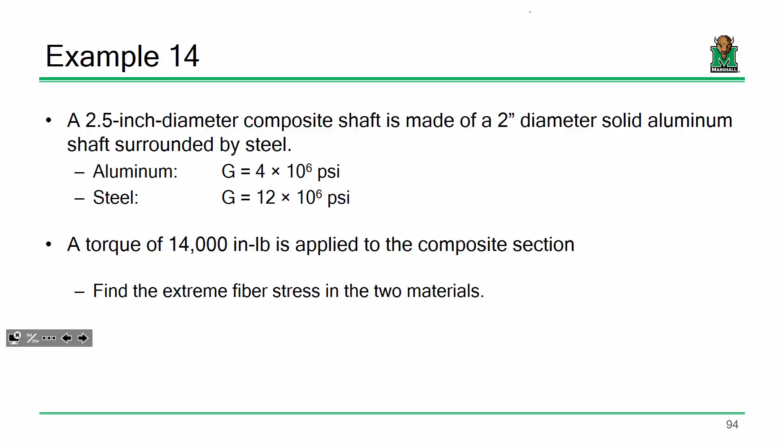Now, just real quick, on the composite axial members, we solved that by recognizing the amount of deformation was the same, right? With this, it's not going to be the amount of deformation that's the same, but it's going to be the angle of twist that's the same. So this problem's going to be real similar to the one we did last time. This one is kind of like the problem that y'all had on your homework, where remember you assumed that support A was gone, allowed it to stretch, and then determined what is the required stretch to bring it back. Well, this is going to be the same thing, but in rotations. Assume support A is gone, allow it to rotate, and figure out what it takes to bring it back.

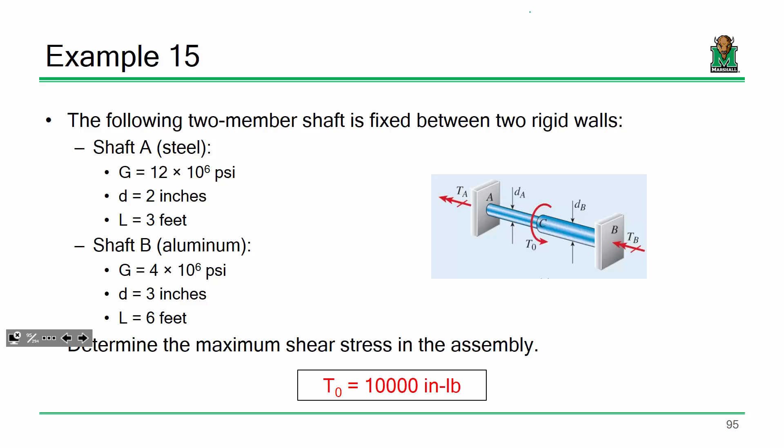And then that's everything with torsion and everything on exam 1, okay? Past that, we get into the world of beams, and we start off with areas, centroids, moments of inertia. Some of this you've seen before, some of it's going to be new, and also I'm going to show you how to do it my way, so it'll be a little different.